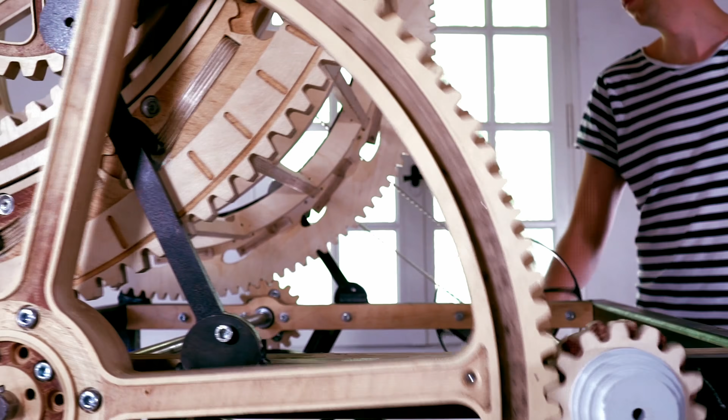Hi everyone, I'm a happy camper this week because I really had this epiphany about what this project should be and how important the playfulness about the project is. The Marble Machine is not a functional project, it's an artistic sculpture. Let's look at how a more playful Marble Machine should look.

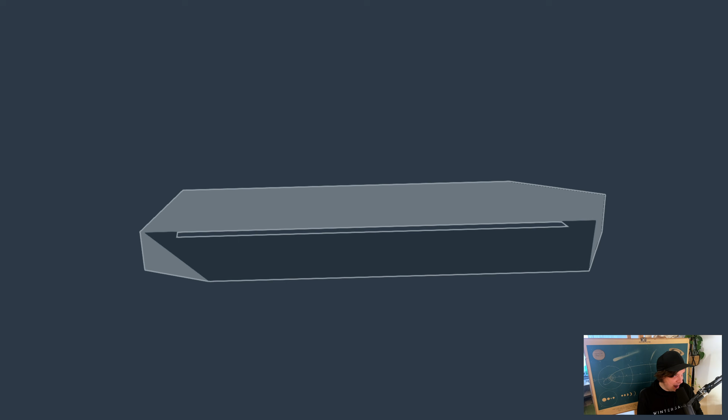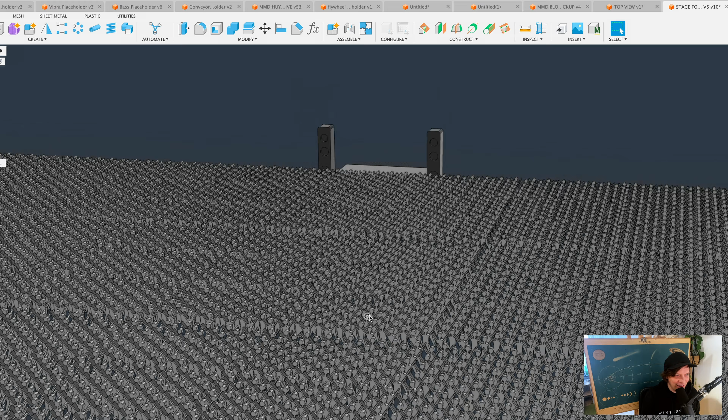So to make this concrete, I have built a stage. We have some speakers and a huge crowd as well. I'm only joking. There's the crowd. Who am I kidding? I can't have this puny little crowd, so let's do a rectangular pattern. There's crowd. Yay! And you know why all these people got the tickets to see the machine that is soon going to show up on this stage?

Because it's playful. Because it's light-hearted. Fun, right? We live on a tiny little stone going through space. It's right there. What else should we do than have fun, right?

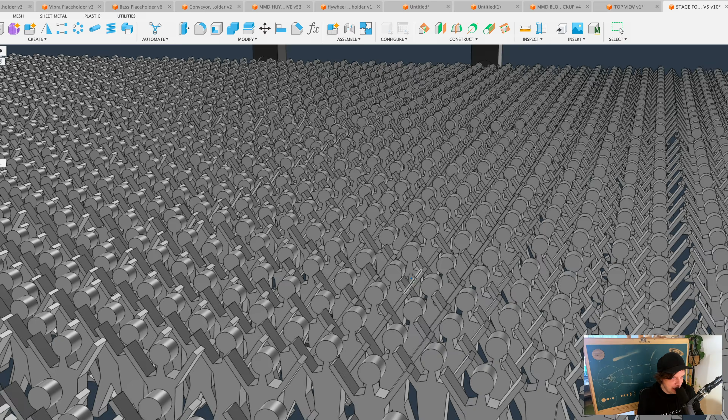Okay, here's the Marble Machine fans. You can see they're very well behaved, and all of them have the exact same exhilaration in front of this concert. So they're wondering, what is the machine going to look like? And the intro music comes on, and boo! What is this crap?

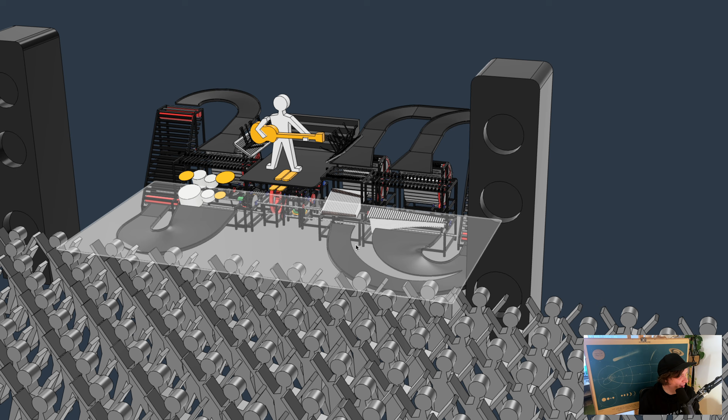This crap has only 90 degrees. It doesn't look like a cohesive sculpture. All single modules. This guy is stamping on the heart of the machine by being on top of the machine, like the machine has no self-worth. Boo, boo, boo. You can already see the audience is leaving the concert. I'm by myself with my functional Marble Machine, playing music to myself. No one cares. Only 90-degree angles.

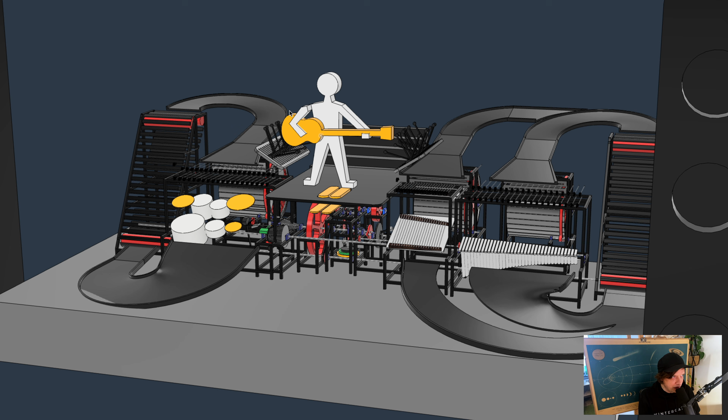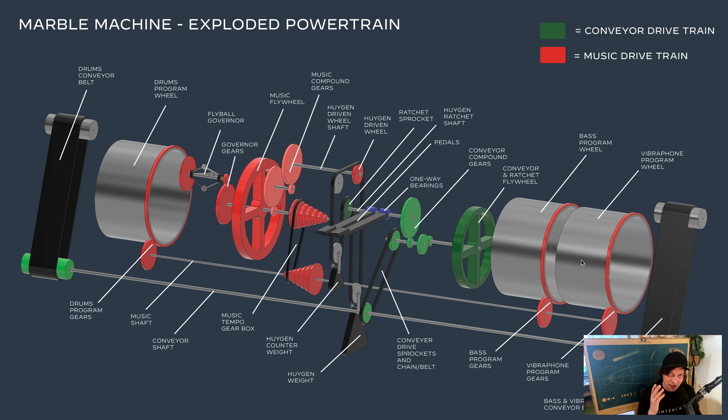And so here's the first thing. Why is there only 90-degree angles? So I thought that it was really important to have only parallel shafts. If we look at this image, all shafts are parallel, which is pretty easy to construct, but everything is facing the same direction, and that creates a very non-dynamic visual look. On the original machine, all shafts were parallel, but this looks dynamic. But why is that? Well, we're looking at the machine from a corner angle.

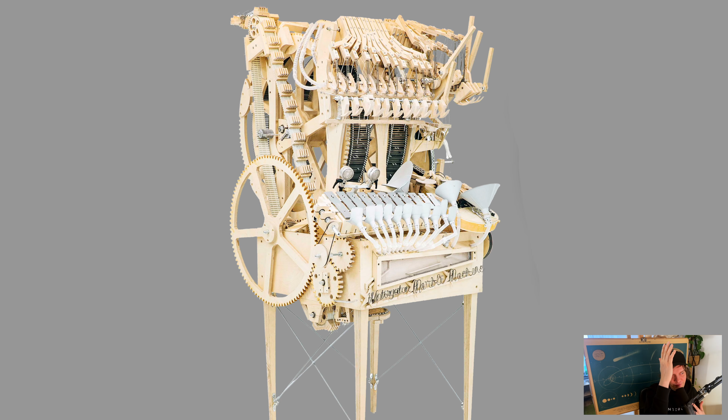So let's try that on the stage here. It doesn't really work, right? Well, you can see that some of the audience is returning. They think this looks more interesting, but this part of the machine just doesn't work because the new machine needs to be larger to perform the music I want it to perform.

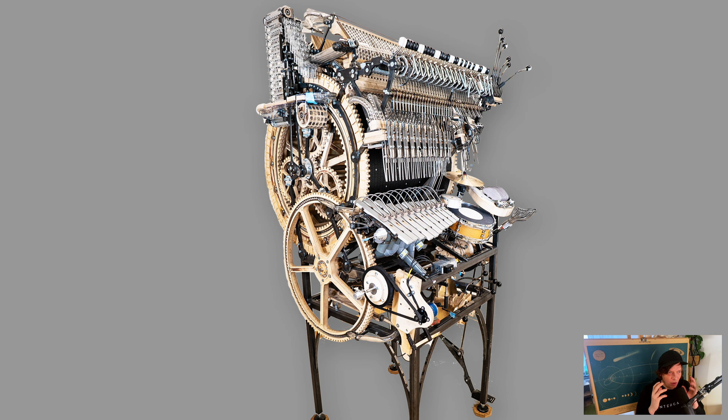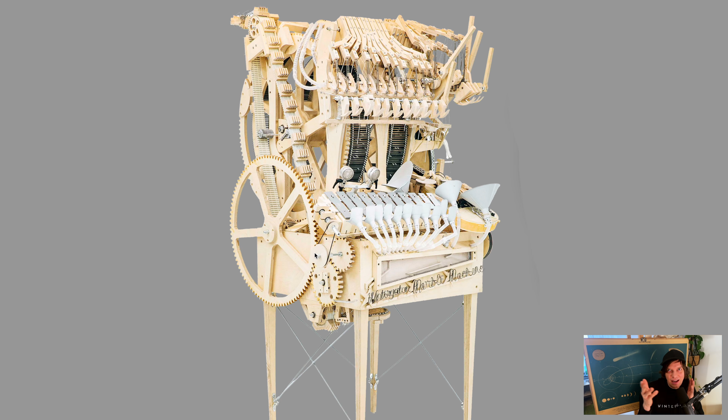To make this one viewing angle look really interesting and dynamic, like I did on the previous machines, both this one and this one are kind of built to look good out of the vanity angle, as I used to call it when I was designing these machines. I can't really do that on this machine when it looks like this. So can we solve it in another way?

Maybe we can. So what happens if we can put shafts at angles like this? So let's, for example, say that this is a 45-degree angle. Can we make shafts work at an angle like this? Yes, we can. If we allow the use of cardan joints, here is a good example of a cardan joint, we can actually angle shafts in any degree we like.

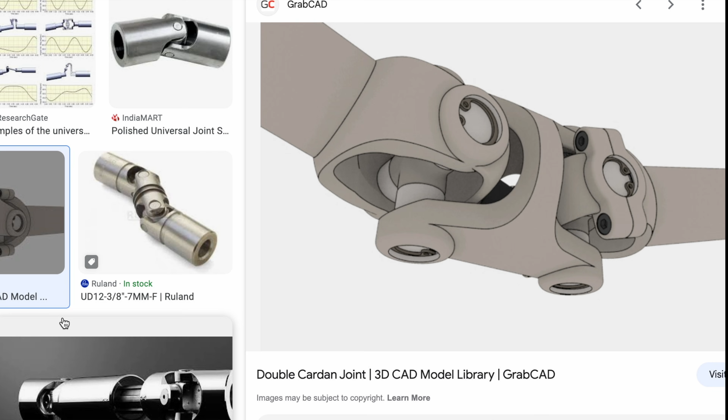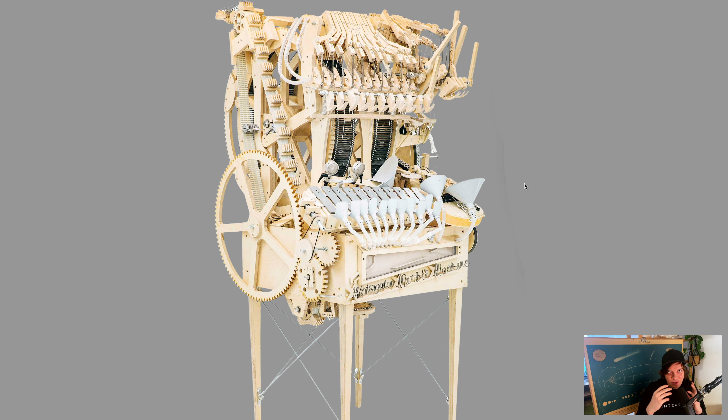But when I started to design, I was like, cardan joints? No, that is not as engineering efficient as just a straight parallel shaft. It just induces problems with backlash, and it's not as precise for musical timing, etc. I just said, no, all shafts need to be parallel. That was how I thought 1.5 weeks ago, okay? But now, when I realized that the looks are so important, could we use cardan joints to achieve some kind of resemblance to the original Marble Machine form factor?

Let's find out. Let's forget this sketch and let's use some cardan joints. Hey! Look at that! What does that mean? Well, the audience is returning right away. Look at that. They love cardan joints. I mean, you better be at the show early because you won't see the marbles from back here. Don't take this sketch as gospel. I'm just fooling around with form factors.

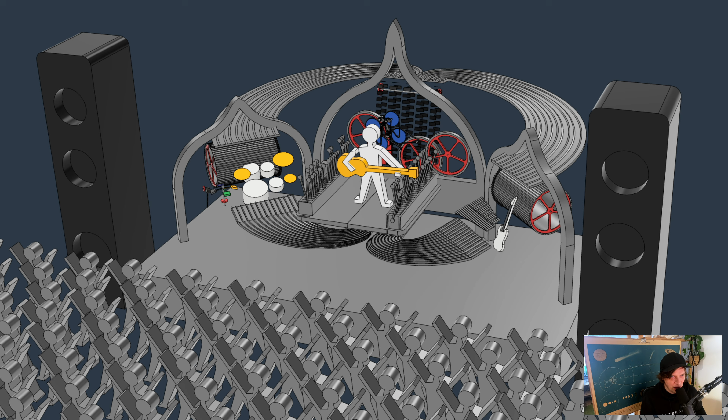But what I have done here is that I have angled the instruments in towards the center. If we look at the top here, the drums and the vibraphone are standing at 45 degrees. And by the use of cardan joints and bevel gears, we can actually accomplish this. This angle makes so much for the impression.

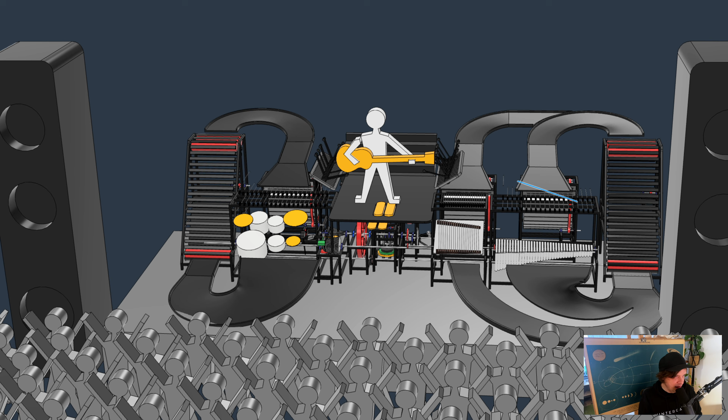In the old machine, the music instruments were kind of not caring about each other. They weren't playing together at all. In the new version, it feels more like a band. Like there's communication between the drum kit and the vibraphone. It just feels much more dynamic.

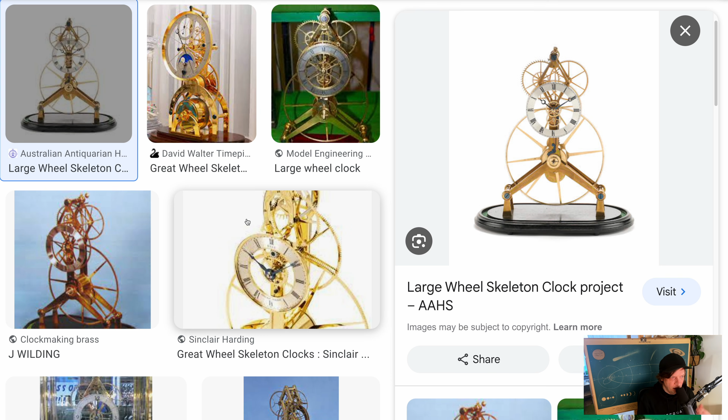If we look at it straight from the front, you can see that this angle of the drums here is the same angle that we have on the original machine. So look at that resemblance there. This type of skeleton clocks are called large wheel skeleton clocks. And I find it interesting how they're often being portrayed from this corner angle, which is the same angle that I liked the first machines to be portrayed from.

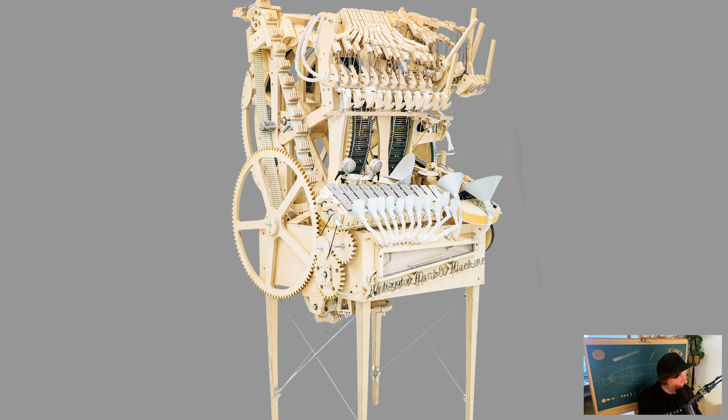As you can see here, the structure is internal and the wheels are hanging on the outside, and it creates this amazing display of the mechanics. So if you look at this design right here, and we'll go back to this, they have the same identity, like I am one piece. This looks more like a factory of some kind. This design still has a little bit of the same problem. It's too spread out. It doesn't feel like one piece, but I am going to put all this together.

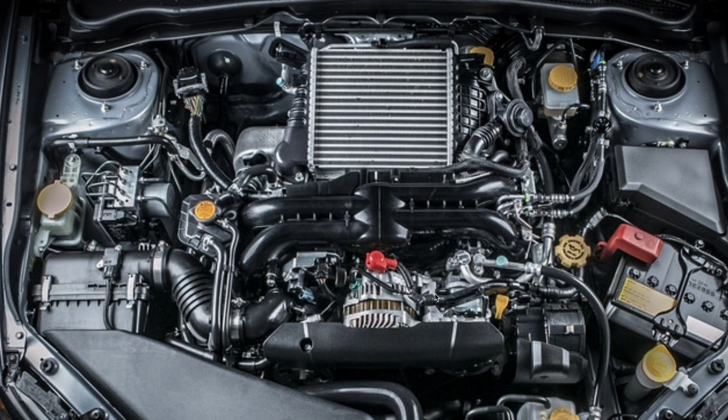And that's the next thing I want to talk about, because when you understand your machine in modules, you can break them out and design them in modules, and at the very end, tie everything together, just like they do in a car engine. I'm pretty sure a lot of these things are separate modules, but as you can see, they had to do clever engineering to get everything together in a tight space.

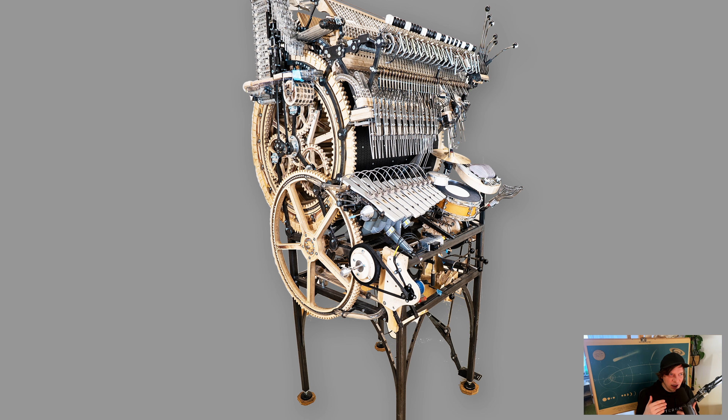So we can compare this car engine to the Marble Machine X, and we can actually see that they're quite similar. This design caused me so much pain because I couldn't get to things and things stopped working. But this design wasn't made with a good design process. I didn't have requirements. I didn't even know what parts I needed on the machine before I started building it.

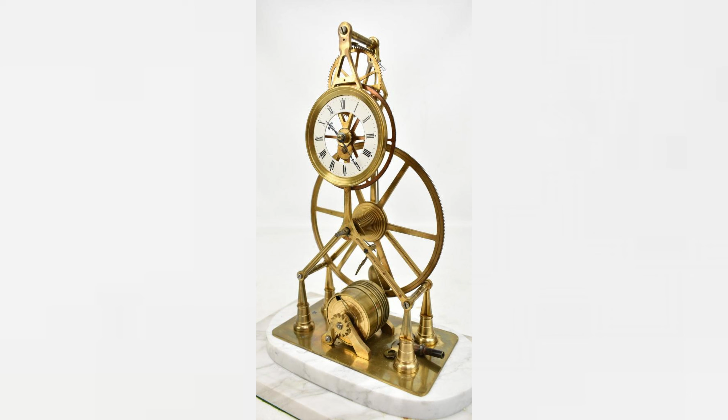When we take this and crunch it together in one skeleton clock sculpture, I think the audience is going to show up in droves, okay? When we do understand the needs of our separate modules, we can then crunch them together into one single beautiful tight sculpture. Okay, so here's another really cool thing we can do if we don't have only parallel shafts.

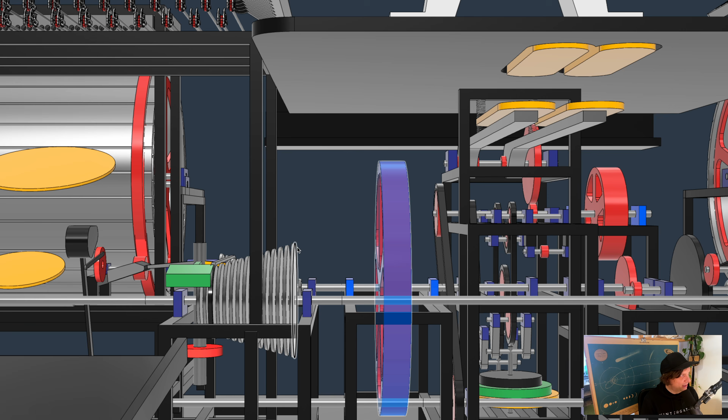My absolute favorite mechanical part of the Marble Machine are the flywheels. That's the most beautiful part of the whole machine. And the reason for that is that it's the flywheels that keep the time. So on my previous machine, can you spot the flywheel? No? It's here. When you put the wheel 90 degrees towards the audience, basically what you see is a rectangle. And you don't see the spokes, anything. You can't see anything. Imagine being at the back of the concert and it's like, that's the flywheel? You hardly can see it.

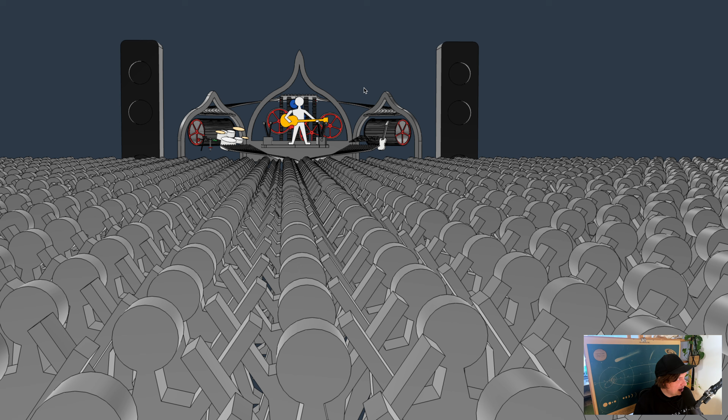It's not cool. And if we look at the new machine, you can see that even from the back of the crowd, you can see the flywheels behind me. This was the design before. Boom, you will see it. If I hold it like this, it's not really interesting. If I hold it like this, it's a bit more interesting, right? And imagine when we turn all the wheels like that so you really can see them. I'm gonna stand in front of a wall of wheels, basically.

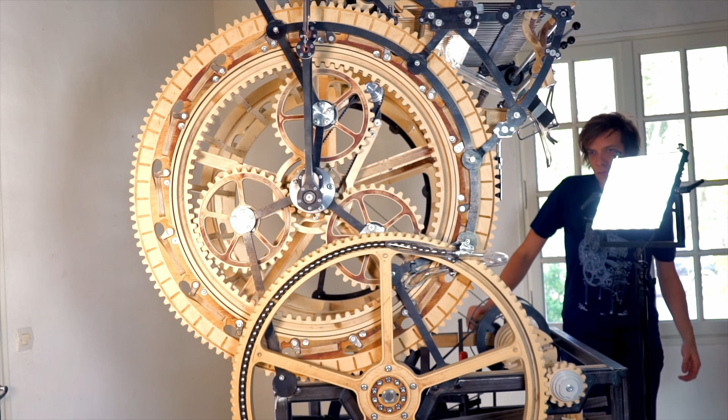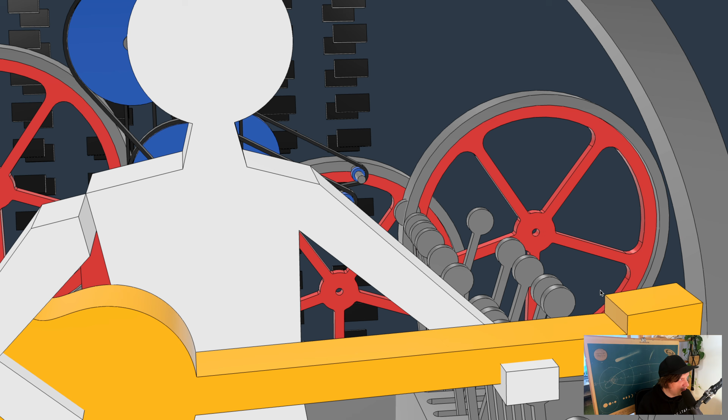So that was the effect of the Marble Machine X. You could see on the side here, all the wheels having all these different speeds. You can imagine the camera angles. We take a close-up of me playing guitar, and you have the wheels like this in the background. A close-up of me manipulating the levers, and everything in the background is moving. The conveyor belt is going up, these wheels are turning, these wheels are turning.

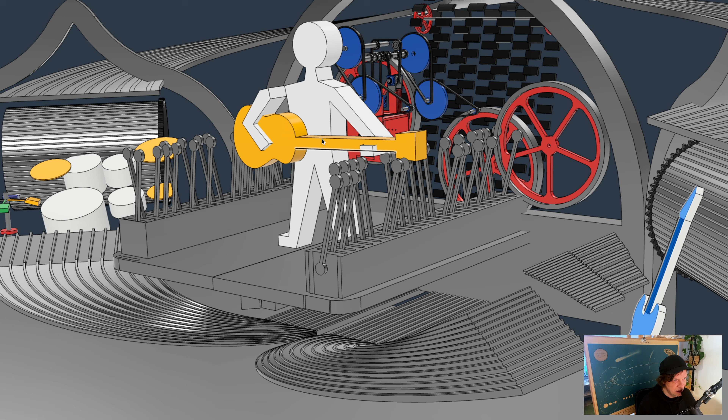Imagine this camera angle. You see everything playing, the drums, the vibraphone, the bass, me, all the wheels moving. Everything here is moving. Like, this is an amazing angle, actually. So imagine you weren't among the people sleeping in sleeping bags outside the arena to get front row seats, and you end up over here. You will still see this wheel moving with your own eyes.

So soon there are these 3 cowbell hits that are so iconic. Da, da, da. Let's listen to those. There, da, da, da, da. I want to build a carousel like that. You can just have 2 marble tracks hitting a lot of different percussion instruments. So I am going to build an Animusic carousel.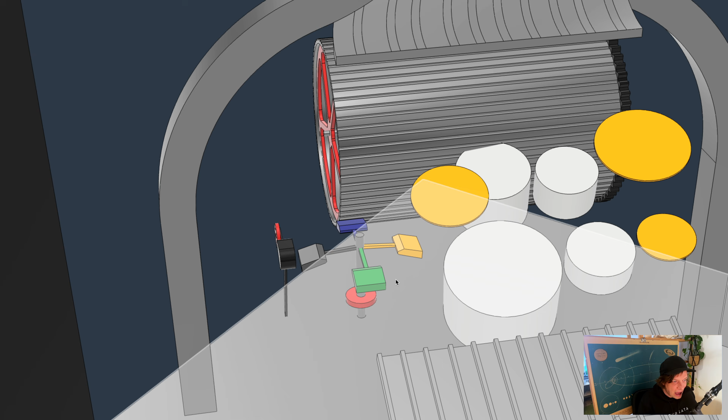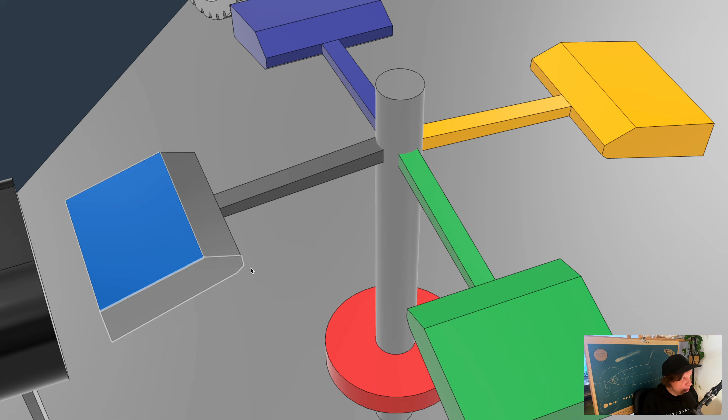So when I was thinking about this project from a strict engineering point of view, I was really into this MVP, minimum viable product. What's the simplest version I could build? And I should build that first. So we should have only a kick drum, a hi-hat and a snare drum, and no cool Animusic carousels and things like that, because that's bells and whistles.

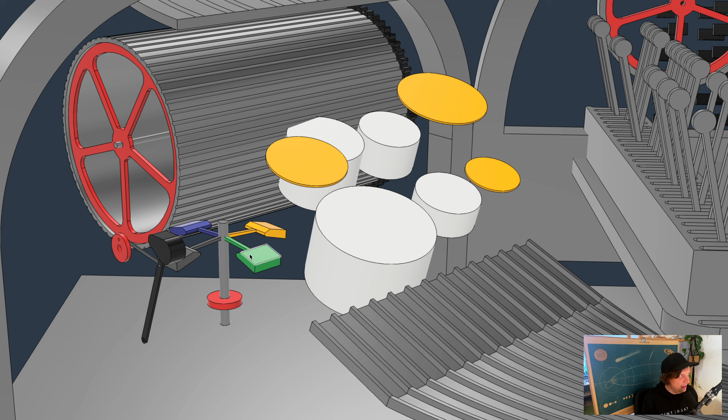And now I've changed my mind a bit that no, I am actually not interested in building a machine that isn't mesmerizing, blowing people's heads off their shoulders. That's the project. These quirky things, the Animusic carousel here is part of the minimum viable product. It needs to be quirky and mesmerizing.

I really love this above angle as well. These tracks are not going to be this big. They're way too huge right now. The machine you're seeing here is not the machine that I'm going to build. I'm just fooling around in CAD.

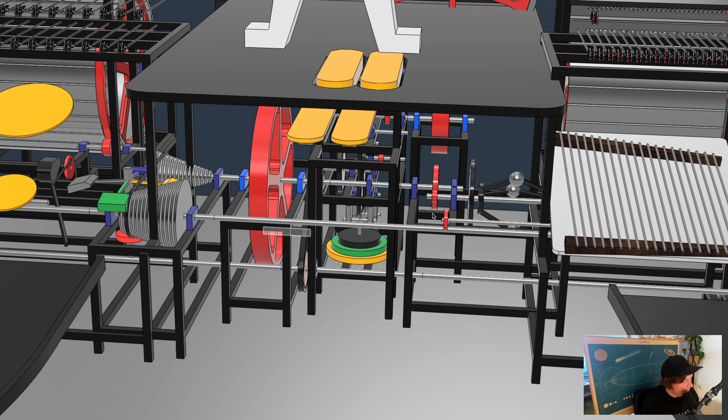So I just want to make one last comparison. 90 degrees. All these beautiful mechanical parts that could be replaced by one single electric motor, we have hidden them away under the floor. So disrespectful. On the new machine, we're gonna put a governor up here or something, you know. And by the way, let me do that. Look at that. We put the governor on top like a true steampunk governor would be placed.

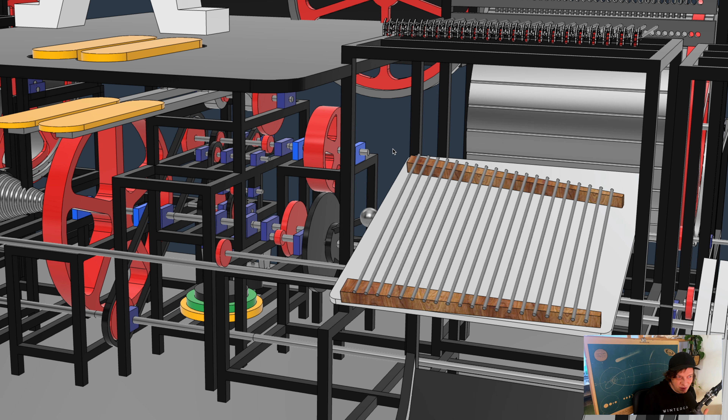Imagine bringing a friend to a Marble Machine concert and your friend doesn't care as much about the Marble Machine as you do. I'm sure one or two or all of you have spouses that are pretty tired about hearing you talk about the Marble Machine. Imagine you're dragging them along to seeing this concert and they're like, oh, that was pretty fun. Or you bring them to this concert and the person you drag along is just overwhelmed with joy that you did, you know? See, I'm thinking about you as well.

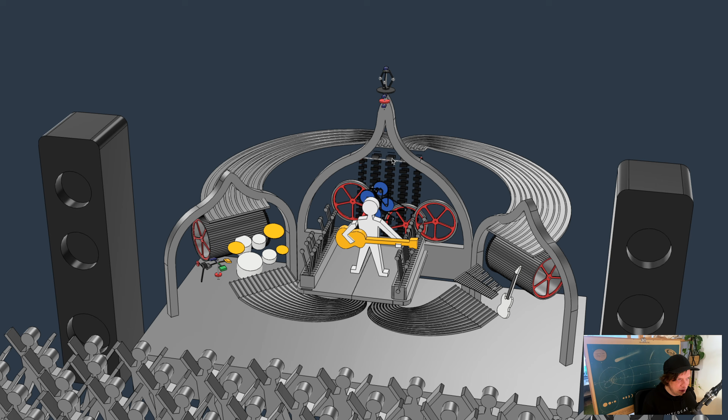Next steps. How can I get from fooling around in CAD to actually making some concrete plans? The drivetrain is pretty much solved. I know how to do that. To divide the marbles, I know how to do that. To make the machine play tight, I know how to do that. How to program the machine, I kind of know how to do that. Where do I go from here?

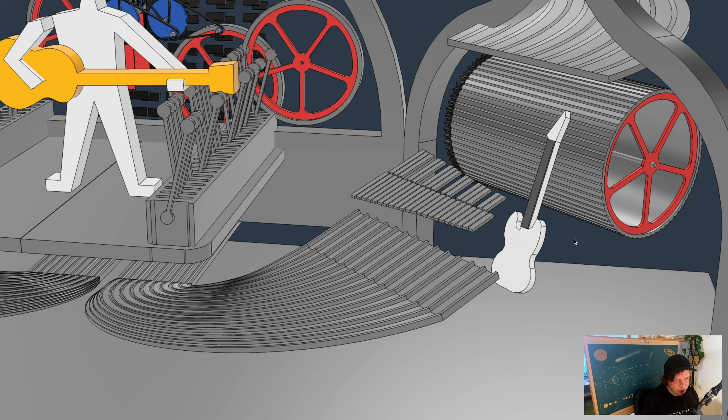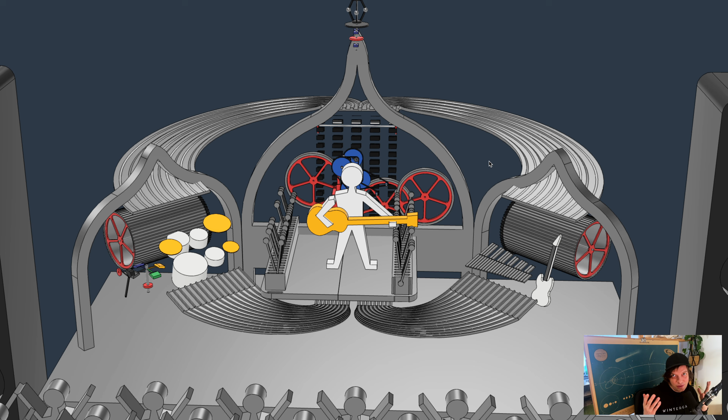I need to write down the design requirements for the music instruments. We have to define how large marbles does the bass need? How many marbles does the bass need? The needs of the bass, how will it affect all the components up here and the programming wheel? I need to define the requirements of the music instruments of this machine. The whole machine then is actually designed from those requirements. So again, this design requirement process teaches me the next steps of in what order I need to do things.

I think I'm going to start with the bass guitar. So I have a brand new idea for how to drop marbles on this bass guitar, and if we're lucky, that's already next week's video.

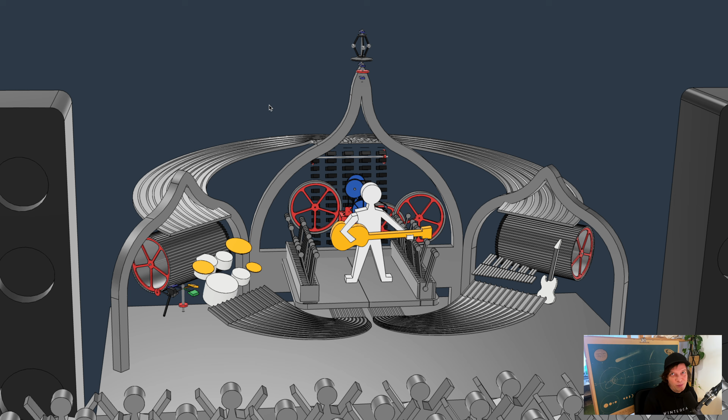And it feels like I'm on the right track. This will not be easy. This will be hard. Let's zoom in one last time to me having fun in front of a wall of wheels. Everything in this picture is moving, all right? It's going to be so cool.